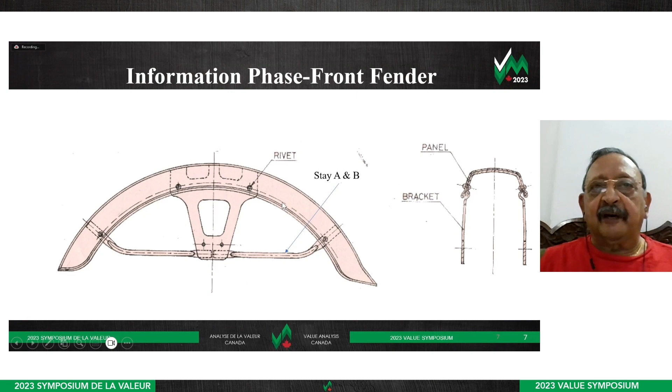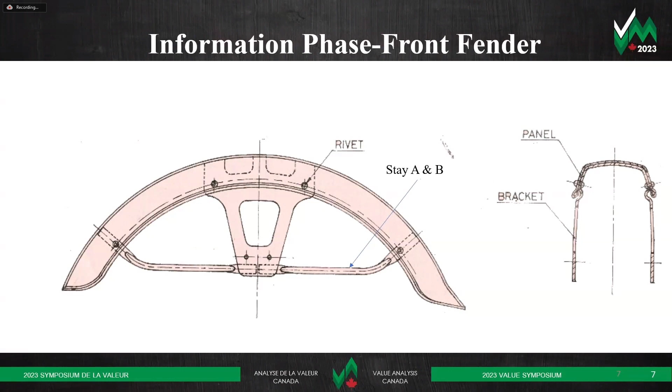In the samples brought from the market under warranty complaints, we found mud all around, with a lot of mud stuck in this area. When the mud is wet and remains wet for a long time, it creates more and more rust. There are also stays here made of tube, which were supporting this fender and reducing vibration.

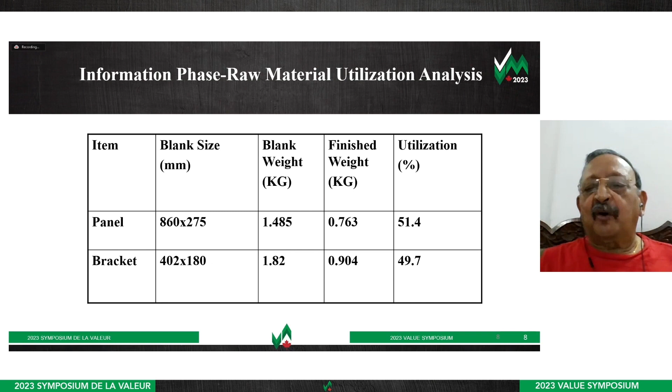When we did the material analysis for the panel, this was the blank size, and the weight of the blank was 1.485 kg. The finished weight was only 0.763 kg, meaning the material utilization was 51.4 percent, and the rest went as scrap. The bracket also did not have better utilization, only 49.7 percent. This analysis showed the team there was very good potential for reducing cost and increasing material utilization. Let's see.

Now, the detail of the cost for the whole fender.

Raw material 32.52, I'm talking of Indian rupees. Labor and overhead 36.41, you can see in Canadian dollars figures. Plating is 22.42, bracket 86.4. Rivets are 8 numbers, made of stainless steel, 2.24. And the complete fender is 180.29, or $3.

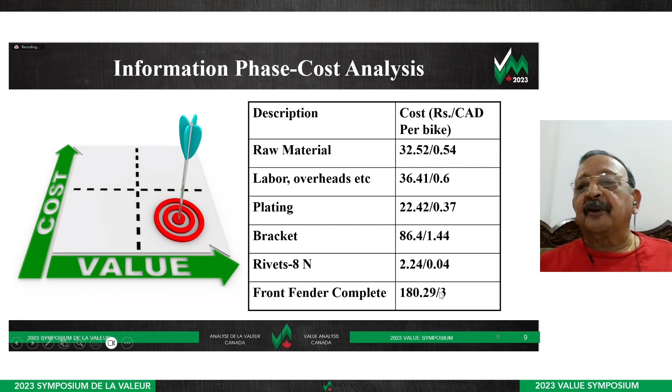Now, in the function phase, the most important phase of the function phase, if we are good at asking a certain question to ourselves in the team, what is it? What does it do? And what must it do? Now, first question, what is it?

So it's a fender. Now, what does it do? It stops matter. It has to stop matter.

But what must it do? It does so many functions: locate parts, increase strength, increase durability, prevent corrosion, enhance aesthetics, minimize vibration. All these functions, if we ask this question, what must it do? Then the answer comes: it must stop the matter.

Because the purpose of the fender in the bike is to stop the matter, whatever is coming on the road, that tries to kind of fly off with the running rotating tire. So that could be mud, that could be a stone, that could be any metallic piece, or it could be anything. So it has to stop that. That is the primary objective of having the fender.

Rest of the functions, locate parts, increase strength, increase durability, etc., they are not basic because this is not what a fender must do. Must do is stop matter. So only one function is the basic function. The rest are all secondary functions.

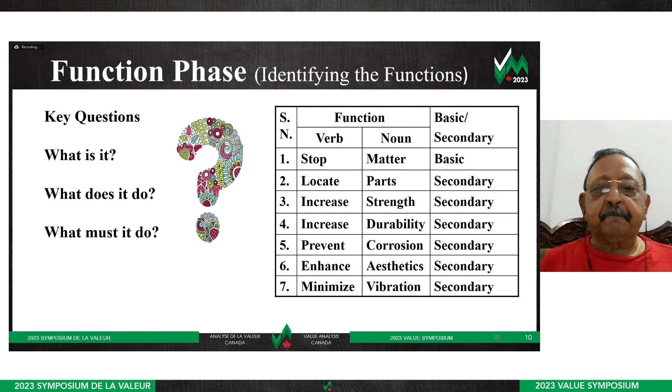Now, when we go to the next step, we find out the cost of these functions. Finding the cost of the function comes with a little bit of experience. So we discussed in the team, argued with each other on so many points, and found out the cost of each function. Stop matter, basic function, is 12.66.

Locate part 43.29. Increase strength is 8.86. Increase durability 66.79. Prevent corrosion 21.06. Enhance aesthetics 19.93. And minimize vibration. The next step is we have to find the worth.

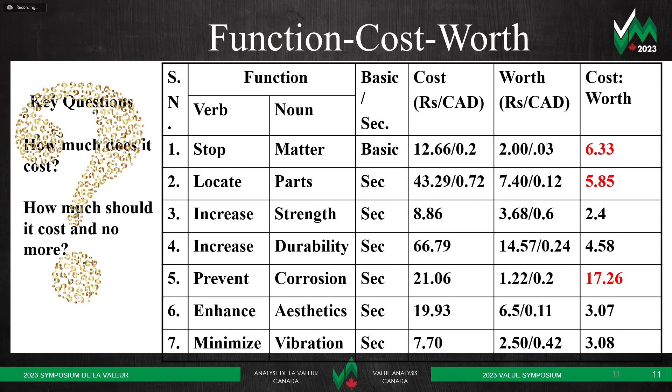Because until unless we find the worth -- worth is the amount of money that should be spent for doing that function, the minimum money that should be spent for doing this function -- so the worth came out to be 2 rupees, 7.4, 3.68, like this.

And then if we find the cost to worth ratio, either we take cost to worth ratio or we take cost minus worth, that is the value gap. That's called value gap. Either of the two we can use.

So we have used cost is to worth, and the cost-worth ratio comes to 6.33 for stop matter, 5.85 for locate parts, increase strength 2.4, increase durability 4.58, prevent corrosion is 17.26 because the worth is too low here, enhance aesthetics is 3.07, and minimize vibration is 3.08.

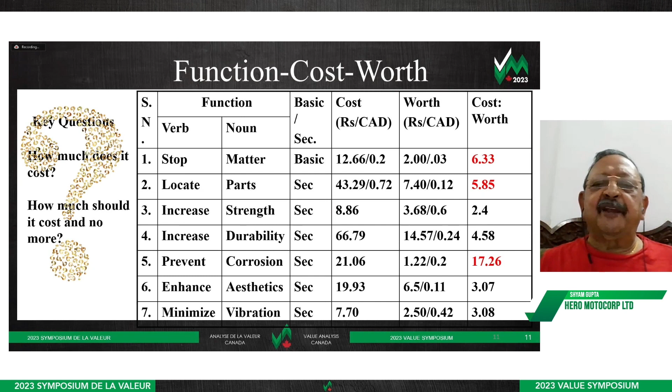Now, general guideline in value engineering that I have learned is that if the cost-worth ratio is more than 2 or 3, it is a good function for further value study. If the ratio is less than 2, the opportunity for reducing cost is minimal.

So we chose three functions basically: stop matter, locate parts, and prevent corrosion. We will put full focus on these functions for reducing cost in the further analysis.

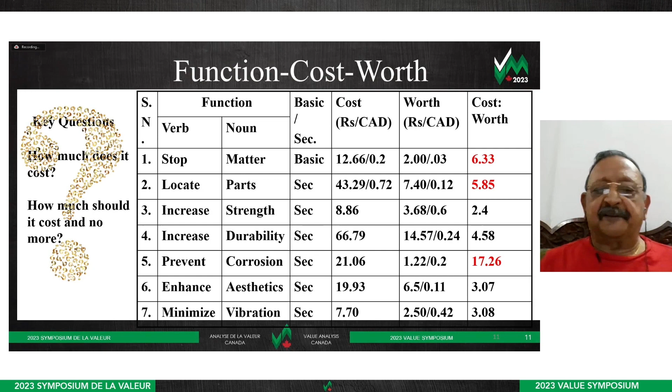But what we do is we sit down in the team and we set up a few rules for brainstorming. Now, one of the rules is that there is no judgment on any of the ideas when we are still in the brainstorming session -- no judgment and no criticism, no laughing at anybody's idea. And we have to welcome each idea royally, as any one of the ideas can become a king one of the day. So ideas have to be welcomed royally.

Now, when we see here, many ideas came. These ideas, not all of them are listed here, only some are listed. But somebody gave an idea: erect a wall.

Now, basically, when we think about the stop matter, we are not thinking Fender, we are thinking stop something, stop matter. So if you erect a wall, it will stop the matter. It is a very wild idea, but it's an idea. It may not work here, it may work somewhere else. So we keep the idea.

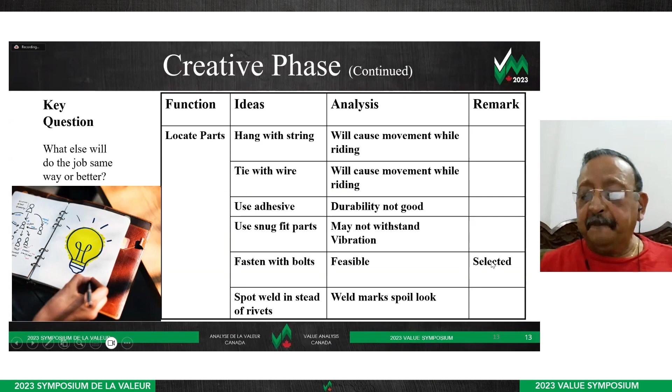Increase durability: use a thicker sheet, use aluminum sheet, use plastic fender. Prevent corrosion: chrome plating is presently used, zinc plating with bright finish, but it doesn't have adequate corrosion life - it's very short. Plastic fender is a good idea here, easy to produce but needs to be painted.

Acceptability by customer is poor because customers reacted to it, and the marketing department reacted that plastic is not acceptable in India at that time. People think it is very weak and that it will break.

The other idea was painted steel fender. It is being used as another reference model, but in India, acceptability is poor again.

Prevent corrosion continued: use anodized aluminum sheet, it's a good idea but it gets scratches very easily. Use anti-rust chemical treatment on existing fender, but reproducibility is very poor and right equipment is not available for mass production.

Using stainless steel sheet is a good idea - corrosion life is very good, aesthetics is also good, cost may be higher, so it was selected for further studies. We'll see about the cost.

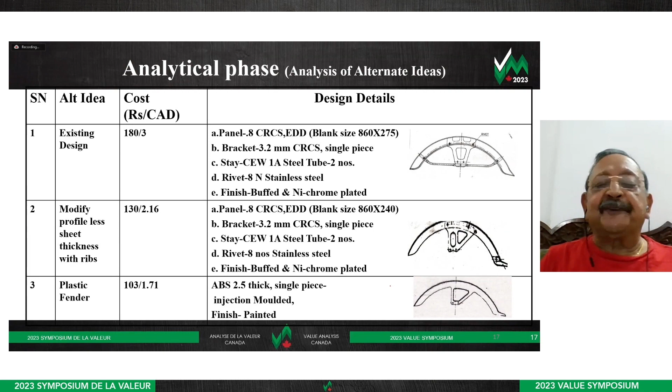All these selected ideas have now been detailed out here. The existing design, as you already know, is made of 0.8 millimeter sheet, and the bracket is 3.2 millimeter thick. Stay is tube, rivets, and finish buffed and nickel chrome plated. And this is the fender.

Then the second idea was to modify the profile, use less thickness of sheet, and give ribs for strength. Now this is the sketch - that's how it looked.

Plastic fender looked like this. We made some plastic fenders also for testing purposes.

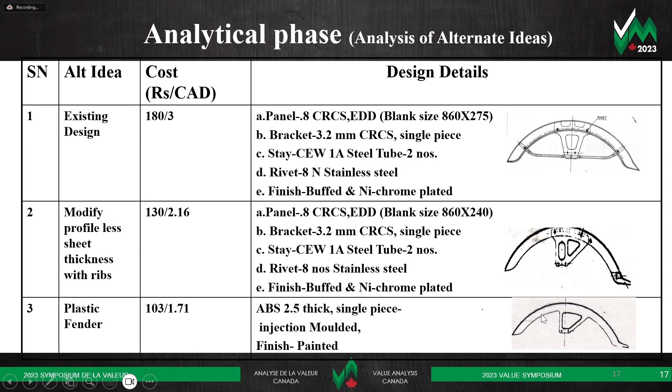Then the fender made with spot welding - instead of rivets, it was spot welded here. Fastened with bolts and screws, so instead of rivets, bolts and screws were fastened so that you can open it out and clean it.

Use stainless steel sheet - same design, but with stainless steel sheet. Anodized aluminum sheet, the design is the same, only the material and the finish is different.

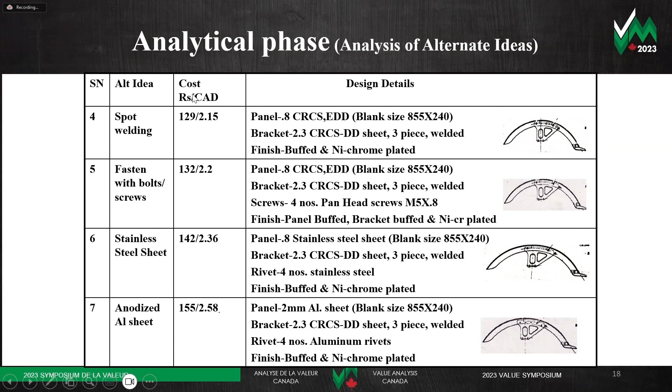And for each of the ideas, the cost has been worked out here. We will compare the cost later.

Now, when all the ideas have been collected and given a usable shape, we are unable to decide at that moment which idea we should select, because there are so many parameters which guide the final selection. We decided certain criteria: strength is one criteria, durability is another because it has to last a long time, it should look good aesthetically, it should be easy to implement, because if implementation became difficult, then we would not be able to work it out.

Initial cost should also be lower, and ease of production should be good. So what we did, we used three guidelines: major preference, medium preference, and minor preference - points 3, 2, and 1.

And when we compare each idea from each criteria, A to B and B to C, and like that, we go on giving these points and we find a score. Total score: strength is getting 7, durability is at 10, aesthetics is 11, ease of implementation 2, initial cost is 1, ease of production is 1.

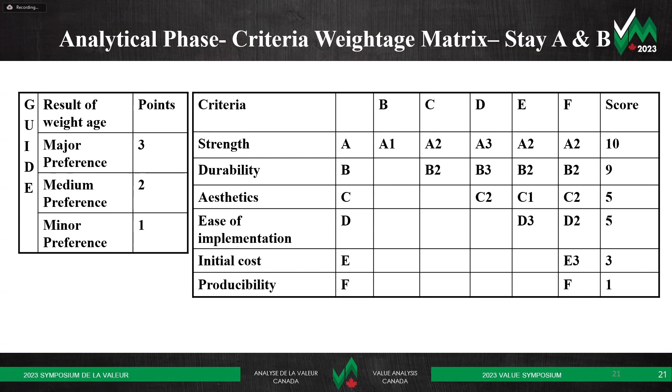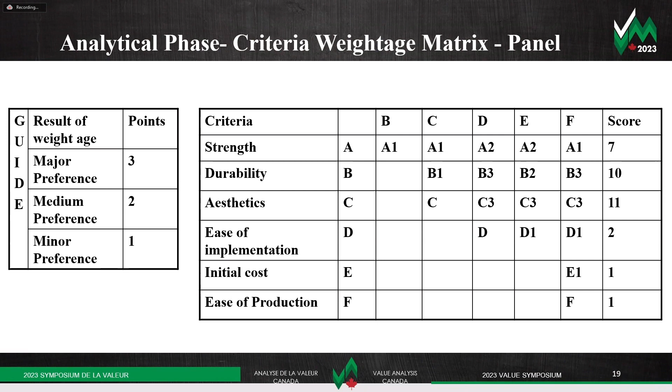So like that, if we see in each of these matrices, the score which is available here is almost correct, almost logical. So we took this as the final score, and then after this final score, we got to check by analysis matrix.

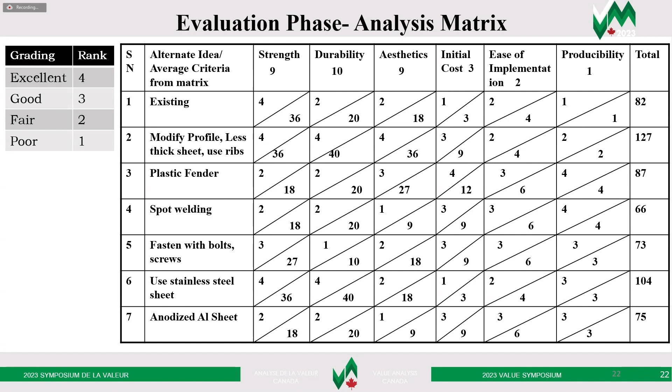But in value engineering, this is sometimes required because we are there to solve a problem, a customer complaint, and not just to reduce cost. At the same time, if the cost can be reduced, we welcome it. But here, if the cost has to be increased, let it be. So we increased the cost, and the cost-worth ratio has gone up.

Just a warning, we're coming up to 1 o'clock, so we need to have a couple of minutes for questions. Okay, can I just complete it? Just a couple of minutes. 3 minutes is what we have left. Yeah okay, we'll do that.

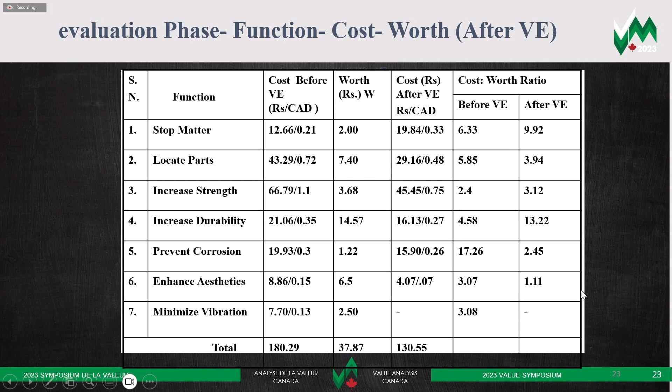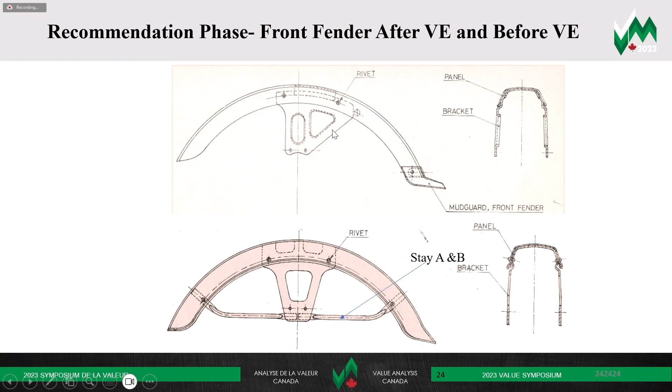Now we can see this is the fender, how it looks in the drawing. There is a bracket, other side there is another bracket, and they are connected by a third piece in the center, and there is no gap. So no mud sticks and it doesn't rust. Now you see how it looks—this looks so smart on the bike here.

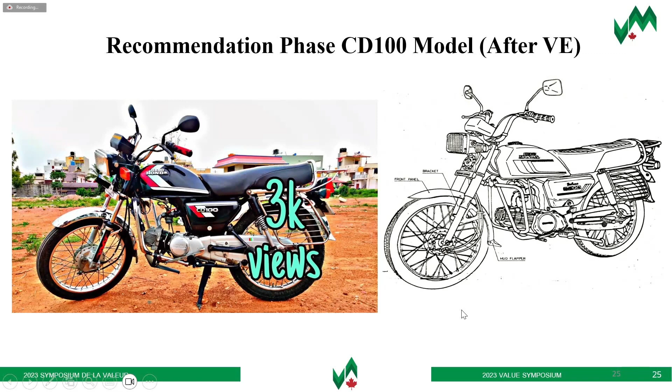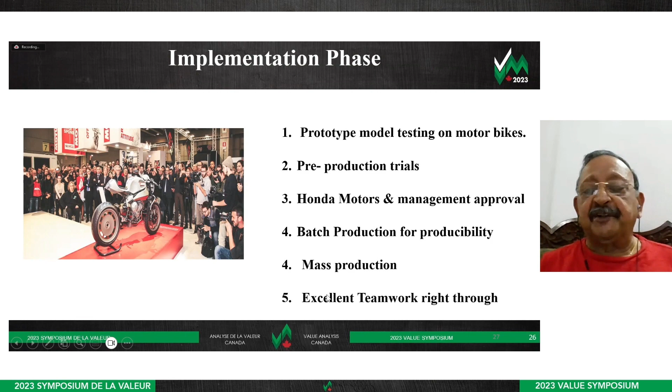Then prototype model testing was done, pre-production trials, Honda Motors and management approval we got, batch production for producibility, mass production, and excellent teamwork we got right through. As I showed you, this is the final result we got. The customer was happy because the rusting problem got solved, warranty complaints went nil, customer value went up, fender performance went up, material utilization went up, and team morale went up. Everything is up. Thank you.